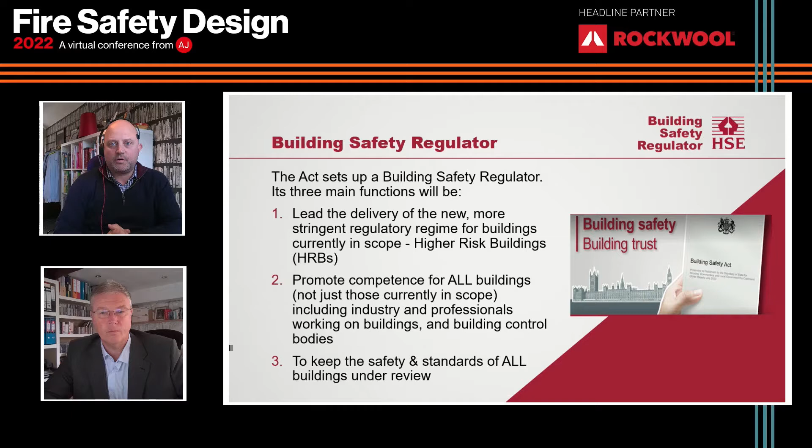Thanks, Colin. My background is I'm a town planner, and I was brought in to lead the Planning Gateway 1 team at HSE. The Planning Gateway 1 regime, if you want to call it that, was established on the 1st of August 2021, and it was able to be brought forward before the BSR proper, as it were.

So it was brought forward ahead of the Building Safety Act because it involved alterations to existing planning legislation, which established HSE as a new statutory consultee for relevant buildings. And Colin's just explained what a relevant building is there.

The policy intent behind it was really to bring forward consideration of fire safety matters as they relate to land use planning, and this was a key recommendation set out in Dame Judith Hackitt's report, published in May 2018.

This first slide here, the approach to fire safety, identifies the sort of dynamic that I observed when I first arrived on the scene as the leader for Planning Gateway 1. And as a planner, I'd never had much involvement in building regulations. It was something that we passed on to the next stage in the process.

But my observation is that there was little or no consideration given to fire safety in the design of residential buildings at the planning stage. So the design presented in planning applications, I'm sure there was some element of fire safety design in that, but essentially it led to a situation where fire safety design problems got baked in once the planning permission was granted.

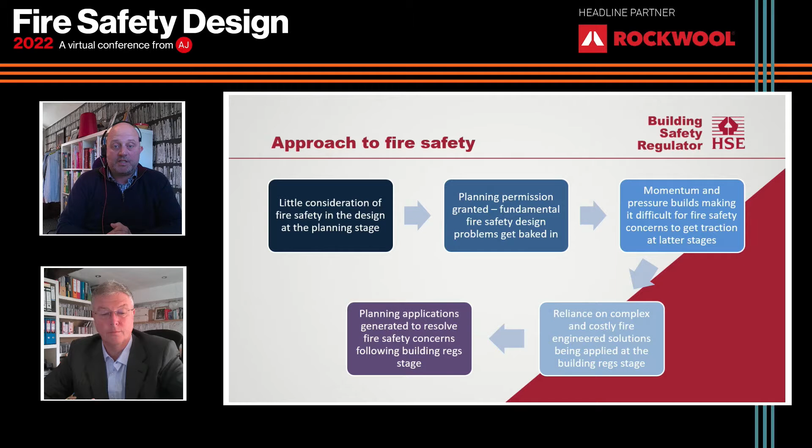And then ultimately, if things were needing to change as a result of assessment at the building regulation stage, this quite often generated further planning applications to resolve those issues, because they involved changes that were material to the design of the building itself.

So since August, we've been assessing planning applications that are referred to us for developments that include a relevant building, and this is essentially a graph which shows the level of concerns that we've been raising month to month since January, when January really represented the first business as usual month following the ramp up of the regime from August previously.

Essentially what you can see there, the grey box, the yellow box and the blue box, grey box and above, shows the number of concerns that we've raised on planning applications, and that represents roughly about, well, the current tally is roughly about 66% of all planning applications referred to us that we're raising concerns about.

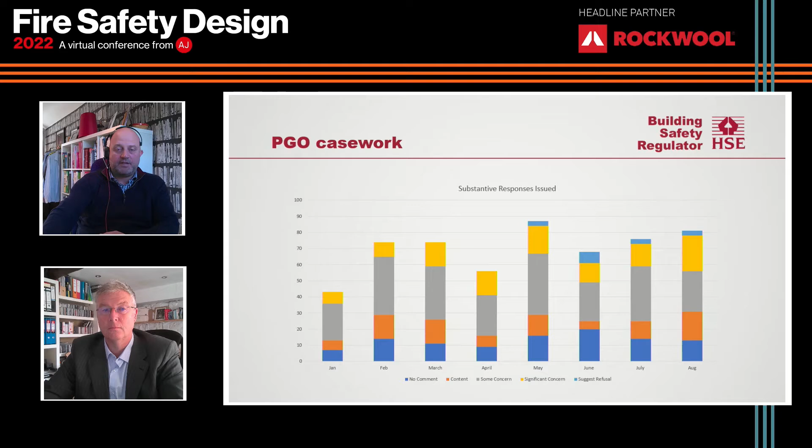Some of the concerns we're raising can be easily resolved, others are more fundamental. But it does demonstrate that problem I was explaining before about fire safety issues getting baked in at the planning stage if there's no intervention, as Dame Judith asked for there to be.

Now this might be familiar to a lot of you. It's the RIBA plan of works. Quite often when we're raising concerns at the planning stage, we're being told you're getting into the weeds too soon, there's too much detail here, these are matters that can be dealt with at the building regulations stage, and they quite often refer us to the RIBA plan of works.

So the applicant will go have a look at the RIBA plan of works, where this shouldn't be being considered right now. We look at the RIBA plan of works, and I don't know how clear it is for you to see, but planning happens under spatial coordination stage 3, and at the bottom there, where that blue box is pointing, it says review your planning application against building regulations. So there's clearly an intention for fire standards to be considered and for applications to be reviewed against them as part of the RIBA plan of works.

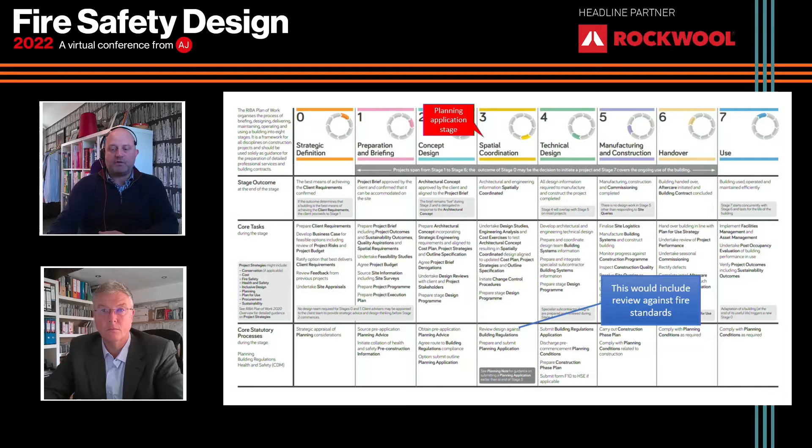So that demonstrates that actually best practice is reflecting, or chiming very strongly, with what we're actually doing in Planning Gateway 1.

This slide identifies some of the typical design concerns we're raising. I'd say about 70% of all the concerns relate to tall buildings with single staircases. We're well aware that current fire standards and building regulations allow tall buildings to have single staircases, but if that's a designed choice that's been made, it comes with compromises that need to be made. These design concerns we raise are typical of some of those compromises.

Here we have a design that we reviewed. It was for a very tall building, 46 stories high. I've anonymised it to save blushes for anyone who's worked on it or the developer. Essentially, you can see the single stair core connects directly with a bin store to the left of it. This is a basement, by the way. It also connects directly to a maintenance store, and by a slightly more convoluted route, connects directly to a covered car park.

These are all areas of high fire risk, and bear in mind that single staircase is the only means of escape for people in upper stories, and the only access for firefighters. Essentially, that fire core should not go down into a basement if it's a single stair. There should be a separate access into any basement area if it's a single stair. So that fire core should have terminated at the ground floor level. It shouldn't even be on this floor plan for the basement, and it demonstrates the common concerns that have been raised.

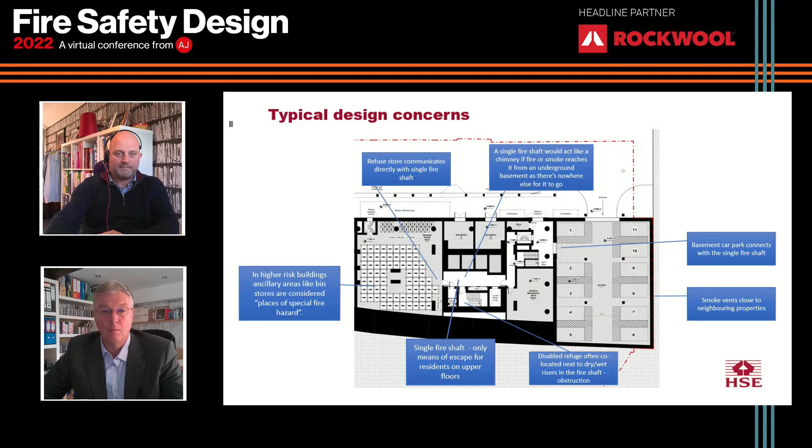Thank you, Mark. Before I move on to what is different and what you are going to have to do in terms of the new regulatory framework, it's important to highlight that there is a new set of secondary legislation, which will be published in due course, complementing the Building Safety Act. There are approximately 34 or thereabouts pieces of secondary legislation due to be issued in short order, probably in the next 3 to 4 months, maybe a little longer.

One of the most important elements is the Building Appointment of Persons, Industry Competence and Duty Holders, England regulations, and this applies to the whole built environment. As I said at the outset, the second function of the regulator is to oversee and promote competence of industry professionals, and that's you. This applies to everybody with a design, construction, or contracting role within the built environment, not just limited to HRBs. It's important to note that these form part of the building regulations, so they can be enforced against if you are not competent in the work you undertake. It's really important to understand these.

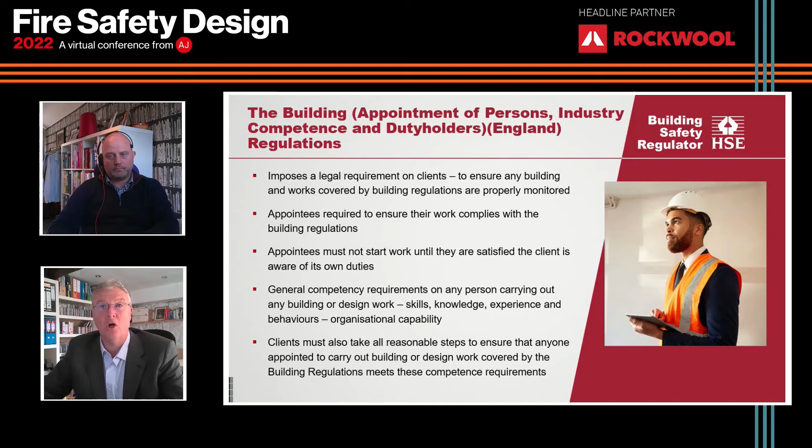It imposes legal requirements on clients, on duty holders in terms of designers, and those undertaking actual building work. It's really critical as part of the overall culture change that you must appoint the right people who are competent to do the job you're asking them to do, right from the outset. We'll refer back a little to enforcement and other things as we go through. There aren't many slides, you'll be pleased to hear. The next one is where I'll spend the focus of my time, but in context this is the most important thing—it increases that rigor and demanding duty holder roles within the design and construction process. You need to make sure the people you use are competent for what you're asking them to do.

So what is different in the functional statutory requirements for approvals? Who signs off what? I think the most contentious question I'm going to ask is, well, who signs off what now?

And I would contend that starts with you as designers. It's your responsibility, along with all of the other people involved in the building regulations and design and construction process, to ensure that the functional requirements are complied with. And that rests with you. It's the person undertaking the work that has that responsibility.

Now, the regulator will have a role within that process, and that role is going to change for higher risk buildings quite considerably to the current building control approval process you are well used to. The difference isn't the guidance. The approved documents and British standards are in a constant state of change and update. So the elements of those guidance documents, those fire safety standards, will change, but the functional requirements haven't changed.

What does change is the timing, the creation of hard stop points in the process, and the need for you as designers, contractors and clients to actually be prepared to plan, manage and monitor the projects at the right times. So, for example, we move from Planning Gateway 1, getting those early designs suitable for the building you're designing, considered appropriately at the right stage at the planning application process. We then move into the building control process.

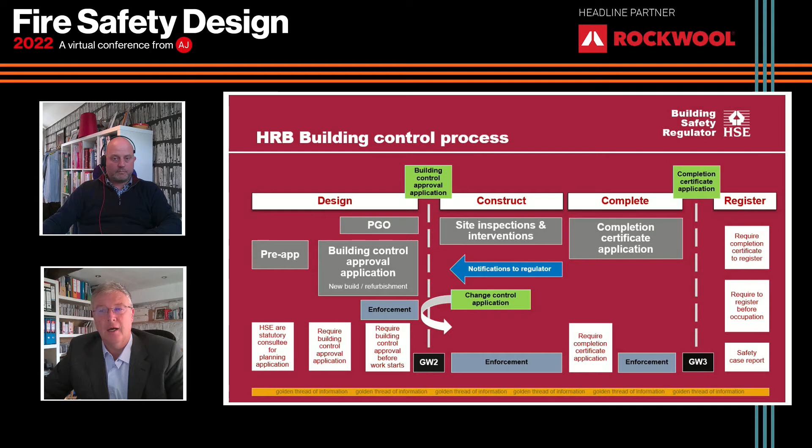I'm sure there'll be a few questions on that. I just wanted to move on in terms of the timelines and where we are looking.

Any HRB, both in terms of new build, significant alterations, adding storeys, recladding, and other changes of use, will come to the regulator as the default building control authority. So that's when the gateways kick off and commence, and therefore that moves forward through to construction. There will, I think, be some transitional provisions for buildings that might be on that cusp of the new regulations coming in, which will be confirmed in due course.

We also open the registers for registered building inspectors and the transition from approved inspectors to registered building control approvers, plus a number of other functions start to turn on in April 2024. The operational standards rules for all building control bodies, for example, will kick in, and the requirement to be a registered building inspector to undertake work across the whole built environment and elements of the registers will start to become absolute.